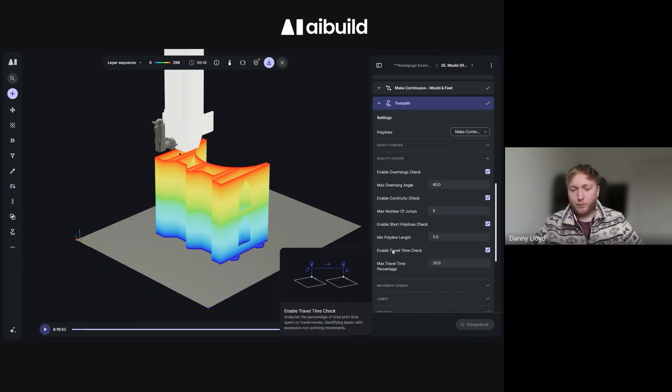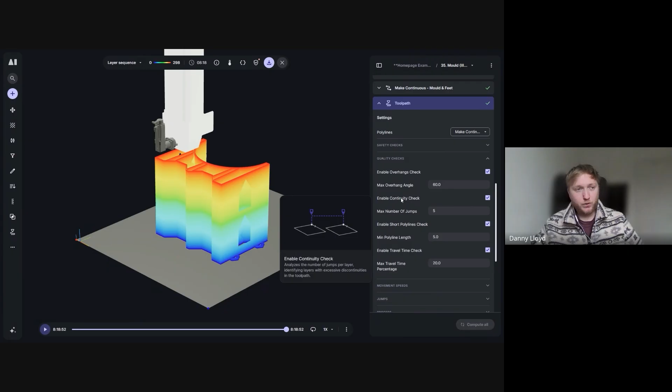We can analyze the toolpath for overhangs and what the maximum allowable overhang is. Continuity, which is certainly a big one for polymer printing, is how many starts and stops are you doing, jumping, moving around. Here you've got quality issues with oozing, over extrusion, visible seams, weak points, all that kind of stuff. So what's your maximum allowable per layer?

Short polylines, so this is really small lengths of toolpath. Are they necessary? Will they even print properly? Are they just going to create a mess? So what's your minimum allowable printable toolpath? And then kind of the efficiency of your toolpath as well. How much time are you spent traveling versus printing? So what's your maximum percentage?

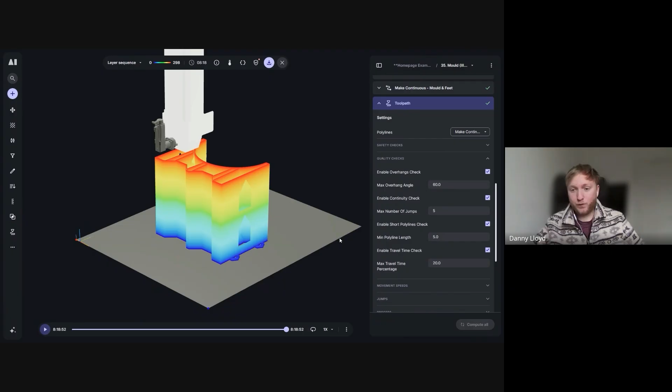So here it's 20%. Of course, these can be all turned on and off for whatever you think is relevant to your toolpath or your kind of process or material. You can put different values here. So it's open to check the quality of your own toolpath.

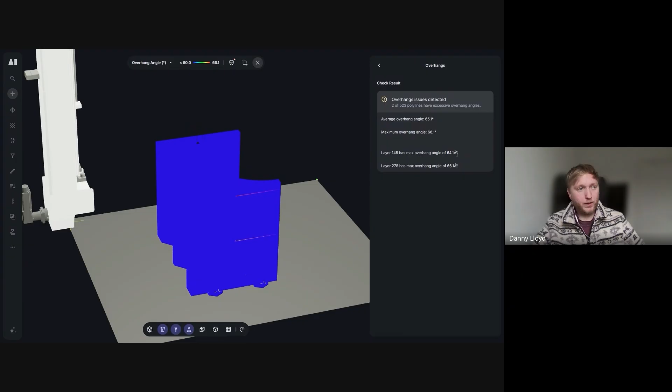So I've created the simulation. We have our print time estimations, and you'll notice this little red dot here next to the safety checker. So safety checks are all fine. Most of the quality checks are fine. We have this yellow warning in overhangs. So if I go to my yellow warning, I can see that at 2 points, we have overhangs that are slightly above our maximum allowable value. And on the toolpath, these are highlighted.

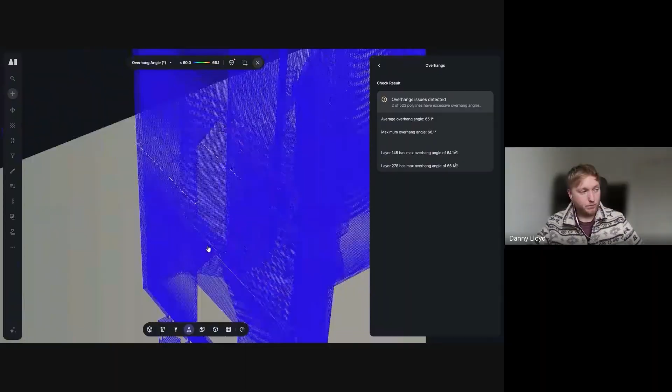So we can see here on layer 278, which is indeed where we saw it. So I'll just turn that off. And that is where we did this material cutout. There's a little jump over the cutout. And the same down here as well. We have these jumps over kind of empty space.

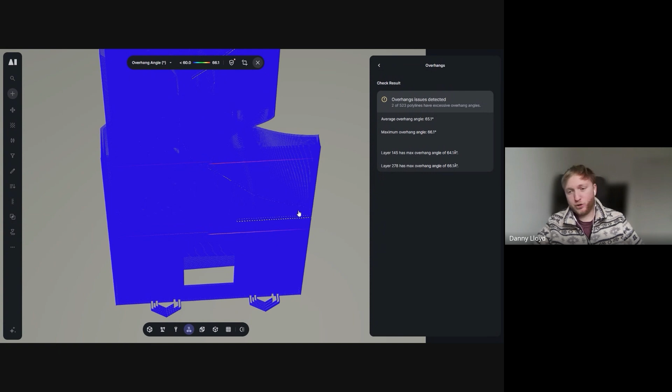They're short jumps, so they're not full 90-degree overhangs, they're partial, but they might be printable, they might not be, but I think we're likely to allow that in printing. Maybe there'll be a tiny little droop there, but this is just the sidewall. It's just above the material savings, so it's not super critical. So I can continue with my toolpath and go ahead and print it.

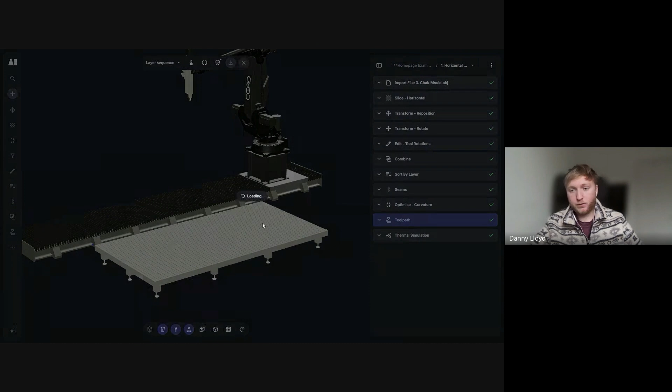So being able to spot those and correct them before printing is incredibly helpful, incredibly important. And like I say, these can be customized to whatever you need them to be. They highlight the errors at different points for different workflows, and we'll be adding more as time goes on. And alongside the things like the thermal simulation, both for polymers and for metals, we're adding a lot of these improved tools and checks and things that users can use to print with confidence right first time.

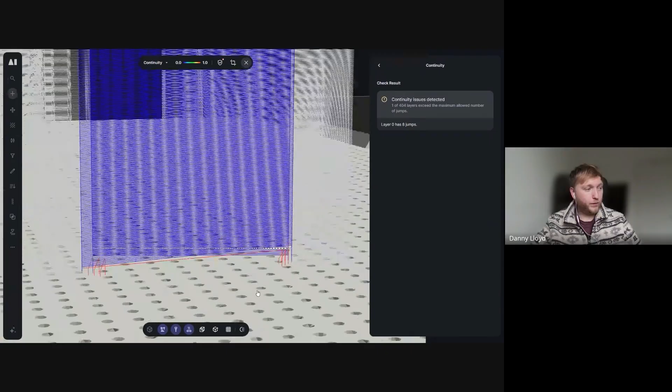Here's another example. Yeah, the geometry team was showing me today the corner analysis, which is so useful. Yeah. We have another example here, but more to do with continuity. So you can see on the very first layer, we have multiple jumps. That's because we're printing the raft for these parts, the brims. So we don't really care here if there's a lot of jumping on the brim. It's not super important, but you see every jump above 5 has been highlighted on that bottom.

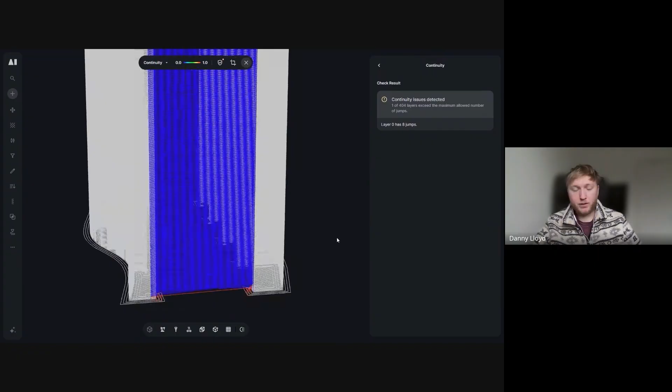And then for all the other layers, it's just one jump from one part to the next, so that's allowable. So it clearly highlights where the issues are, when they happen, and if you want to, you can go and fix it. Here I could, for example, spiralize my brim so that this doesn't happen, but I'm probably too lazy to do that. But at least I can run with the risk knowing that that is going to be the case.

Yeah, we have big plans for this feature that at the moment we keep under wraps, but more things are coming up about it, which we are very, very excited about, and it's going to be very useful for everyone in the community.